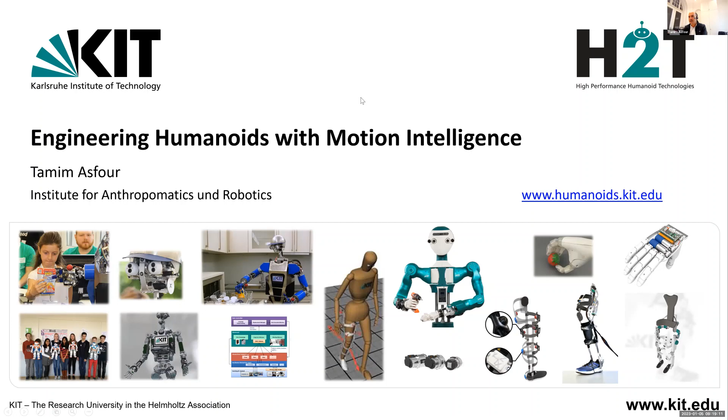Before starting, let me thank my group, a wonderful interdisciplinary team of students and PhD students from computer science, mechatronics, electrical engineering, physics, and mathematics. This reflects at least part of the interdisciplinarity of robotics. Of course, cognitive scientists and maybe neuroscientists are missing in the team, but we are an engineering-oriented university, and this is the same in my team.

We are working on humanoid robots, in particular humanoid assistance robots for daily tasks, but recently we also managed to demonstrate that these robots are able to perform tasks in industrial environments as collaborative robots. We work also on wearable robotics, so prostheses and exoskeletons. We developed the entire mechatronics for these systems, taking into account the requirements of robotics, where you have constraints regarding integration of hardware, mechanics, electronics, and so on in very small space.

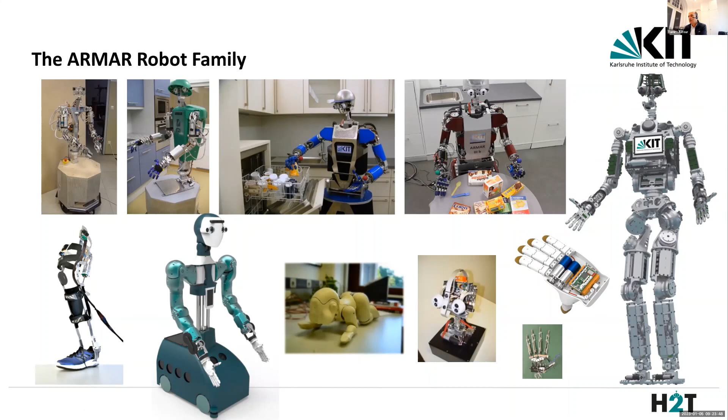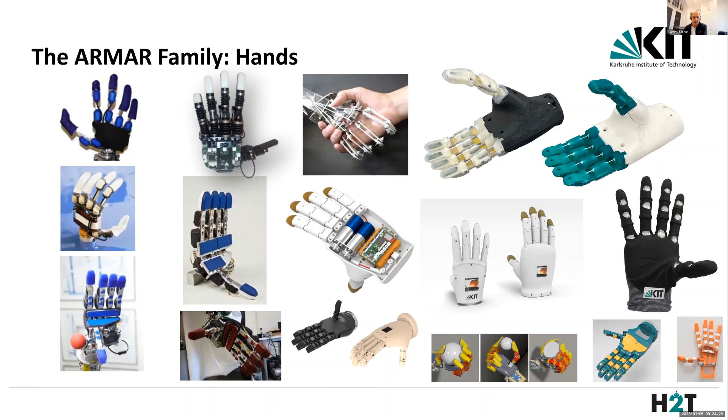Grasping and manipulation also requires hands which are able to deal with a wide variety of objects, and we believe anthropomorphic or humanoid hands are the solution. We started building pneumatically actuated hands with a high number of degrees of freedom, 11 and 14 degrees of freedom here. And we moved from these complex systems to less complex, 3D printed underactuated hands, as you see here, which can be used for humanoid robots, but also for prosthetics.

Here are some of the tasks we are working on. This is our lab.

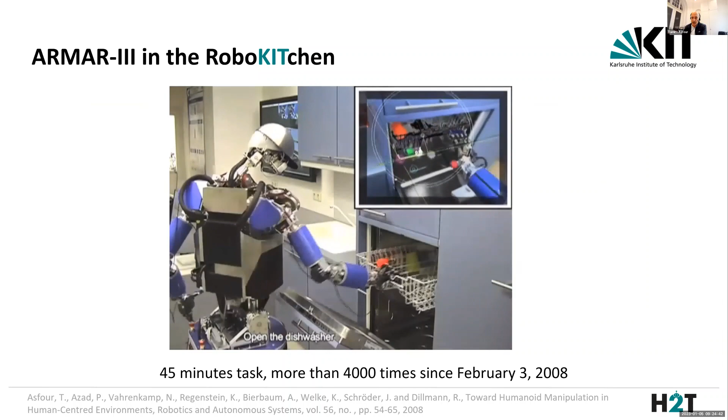It's a kitchen environment equipped with a dishwasher, with a fridge, and so on, where the robot is actually operating and learning how to perform these daily tasks, such as loading the dishwasher, such as bringing objects from the fridge, and so on, while interactively communicating with humans using natural language.

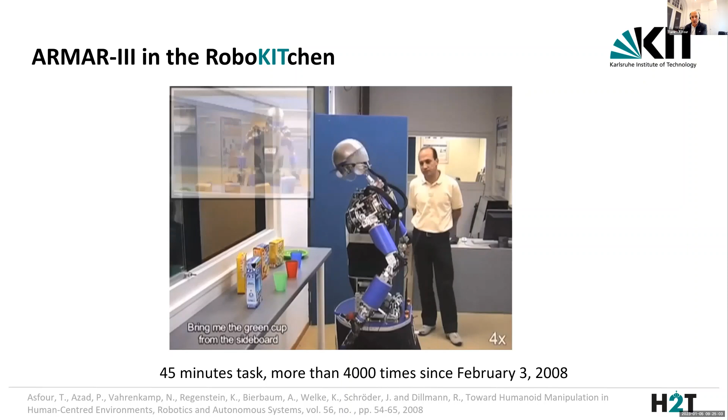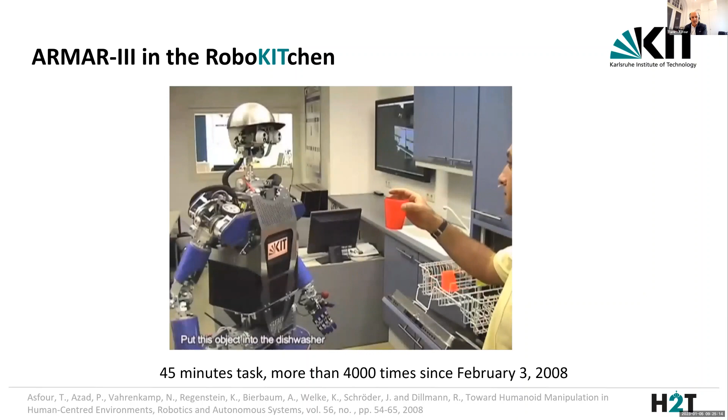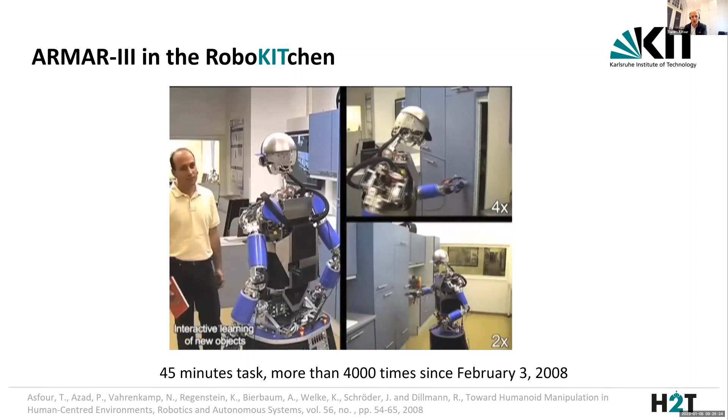I'm a little bit proud of this video, actually. This is my favorite video because I did it in February 2008. And since that time, we are able to perform these demonstrations or these tasks in the kitchen environment for almost every visitor who comes to our lab. And the robot is still working. It's 17 years old, actually, and it's still operating.

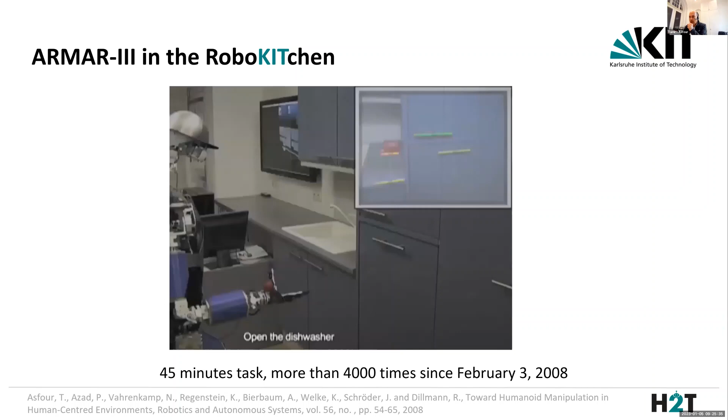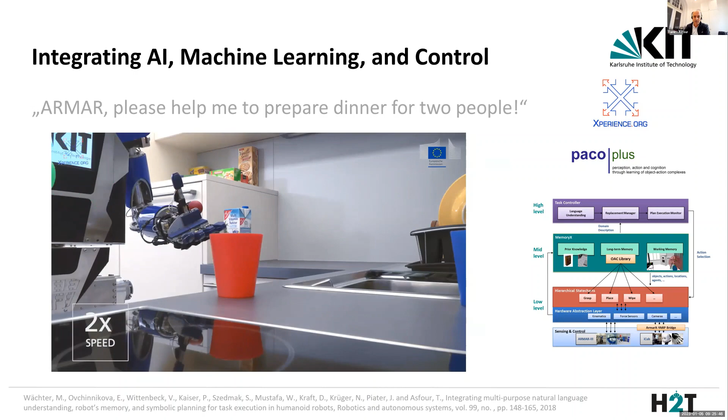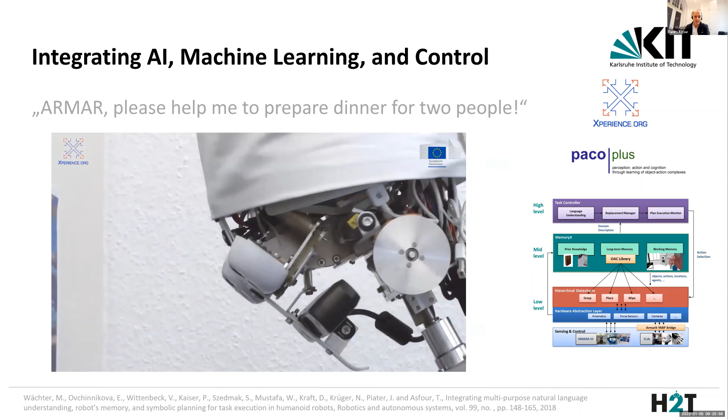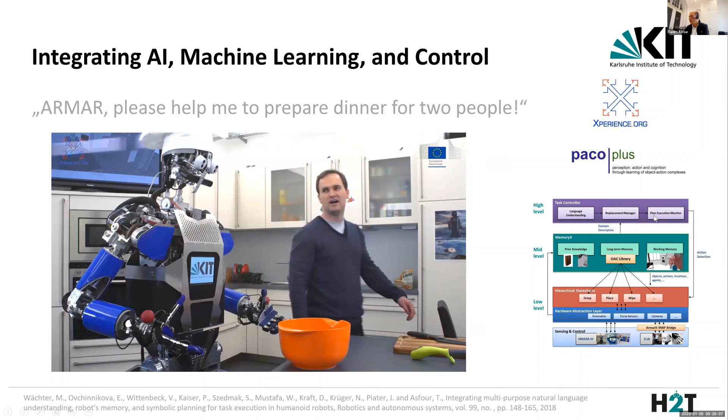So, a little bit more, actually, dive deeper into what's going on here. It's not only about really the execution of sensorimotor programs, but it's about the integration of symbolic and sub-symbolic information, of learning mechanisms into complete architectures, as you see here. An architecture where we have natural language understanding, planning and execution monitoring on the highest level. We have, of course, the sensing and control on the lowest level.

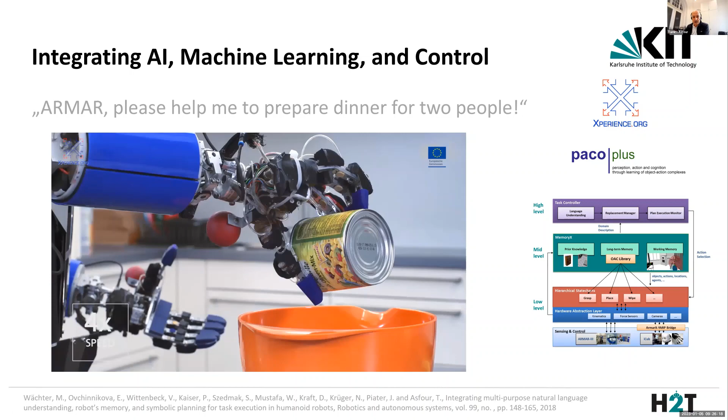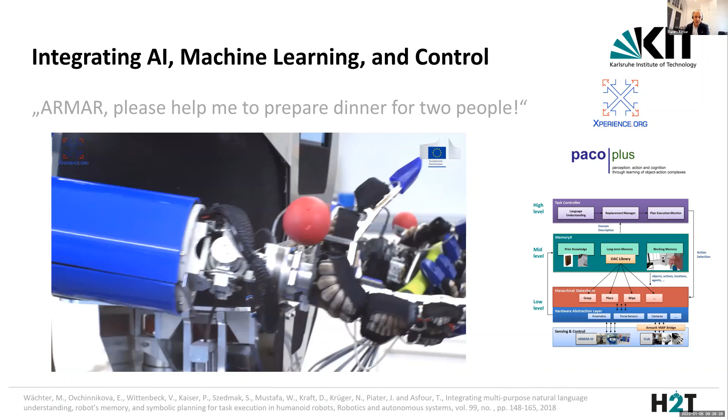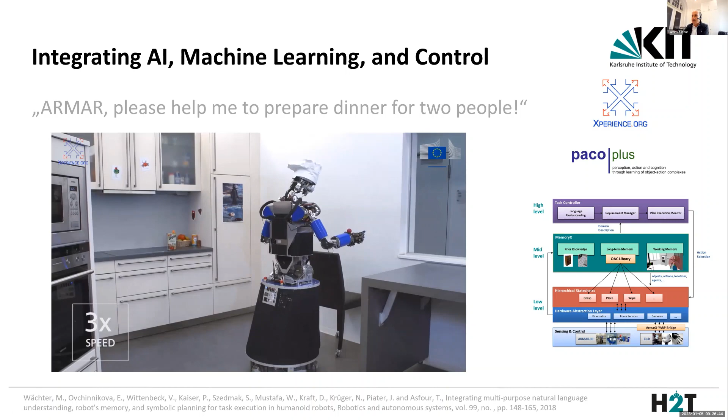And we believe that memories are very important to bridge symbolic and sub-symbolic representations. This is why there is this mid-level of the architecture, a memory level here, which includes different types of memories like prior knowledge memories, long and short-term memories, working memories, and in particular, recently we are working on the development of episodic memories.

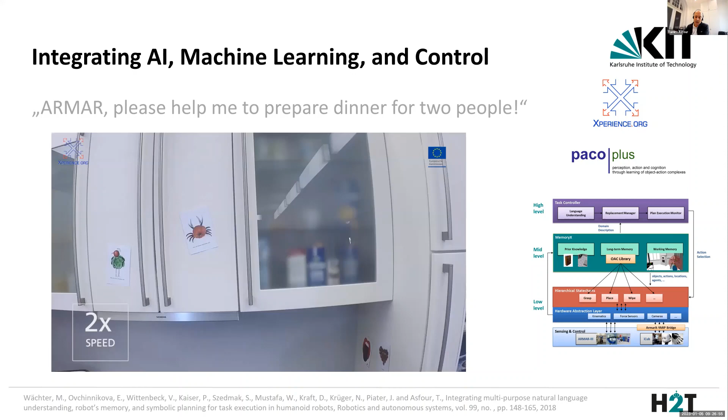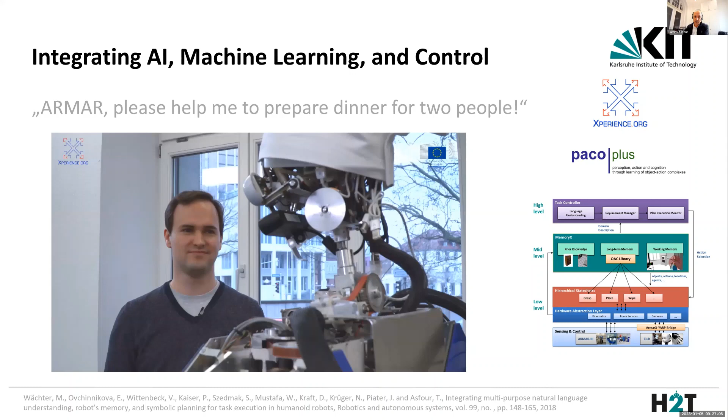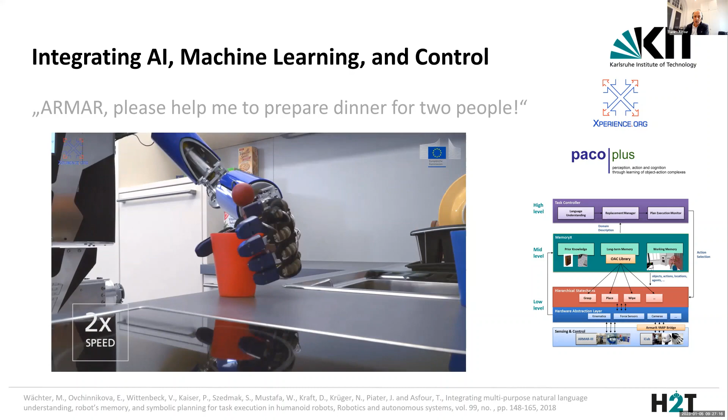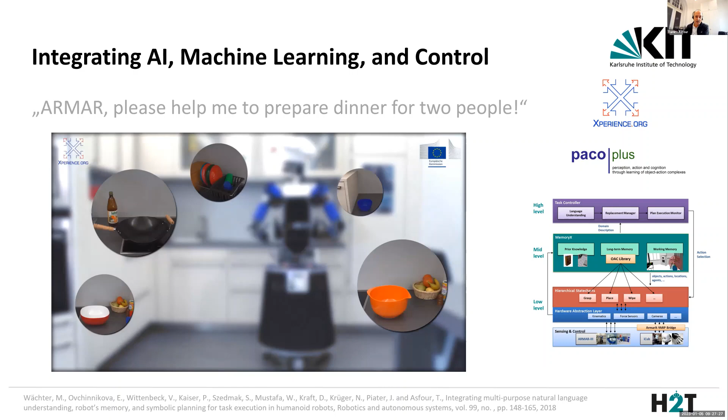But what you see here in this video is actually a robot performing a task, helping a human to prepare dinner for 2 people, not only by executing pre-programmed actions, but by reasoning about, for example, missing objects which are needed to execute the plan. So, for example, the robot can use object affordances in order to replace the salad bowl by the mixing bowl, or it can use object affordances extracted from text mining in order to replace a Coke by a multivitamin juice if the Coke is not available, for example, at home.

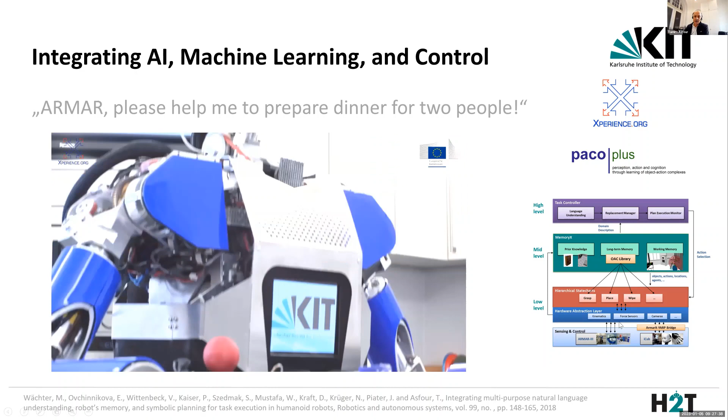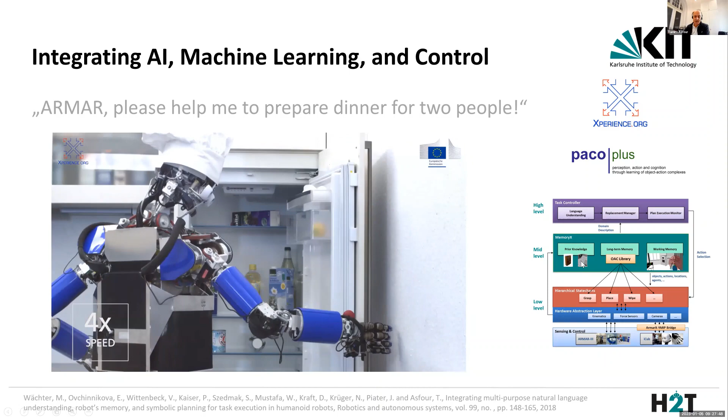In particular, we are heavily working on the realization of such transferable compositional architectures. And in the last years, we focused on the mid layer, which is the memory layer, and in particular there on the implementation of episodic memories as part of the long-term memory of a robot.

And the question is, of course, how to encode experience of a robot. Experience of the robot is everything the robot perceives with its cameras, with its microphones, the motion, with the proprioceptive sensors, and so on. And the second question is how to recall the experience in order to predict actions based on recalled experiences.

And the third question is how to use the knowledge in the episodic memory and to make it understandable for humans. In other words, how to externalize the experience of the robot in natural language, or how to verbalize that. And this is what we did in the past.

You see here a first example where, thanks to deep learning architectures, we could actually implement an episodic memory in which we store visual information of the robot about the task, of course, in latent spaces, and use this visual information in order to predict actions and use the predicted actions and also their durations for time-aware planning. You see here an example where a human is preparing breakfast with eggs. You see the observation and the recalled experience here.

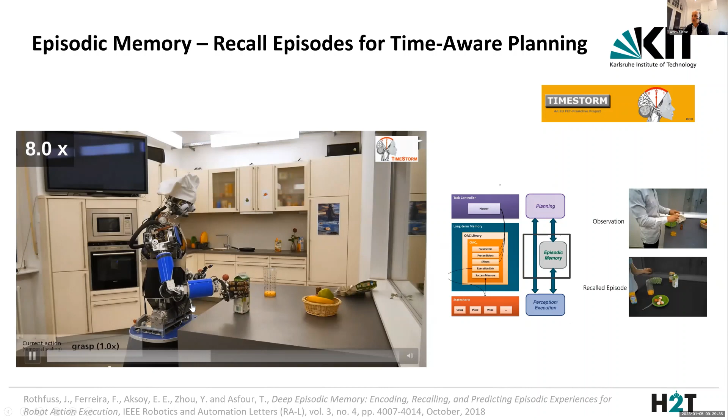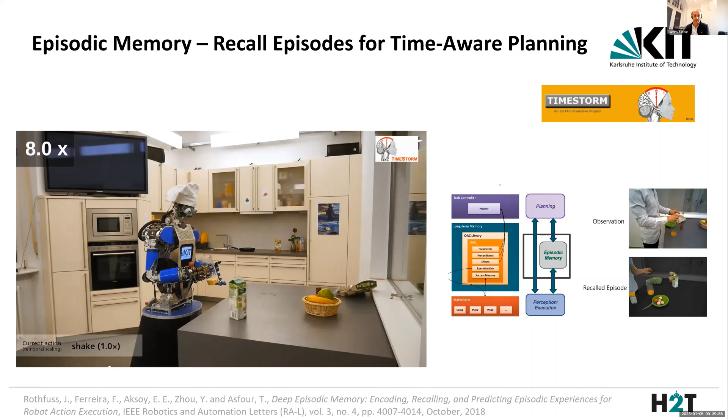And in the video, you may have seen that when a certain episode is recalled, the actions associated with this episode are recalled or predicted and used in order to generate a plan which fulfills the time deadlines we have, for example, to prepare a breakfast by accelerating or decelerating some of the actions required in the plan.

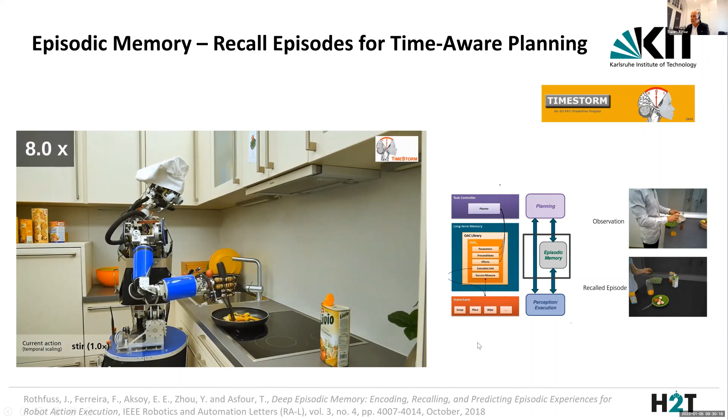Recently, we extended this work. I'm not going to talk about the detail of the deep neural architecture here. If you are interested, you can read it in this paper from 2018. But recently, we extended this work in several ways. So the first thing, we don't store only visual information in the episodic memory, but we store the pose and configuration of the robot, object IDs and locations, and symbolic tasks and the actions which are executed together with the time steps for the different actions.

And we developed two deep neural architectures for creating the episodic memory, not only from visual information, but for multimodal robot experience, and for the verbalization of the experience in natural language, by combining two encoder-decoder models, one which learned the latent representation for episodic memory using LSTMs, and another one for natural language processing using pre-trained transformer architectures.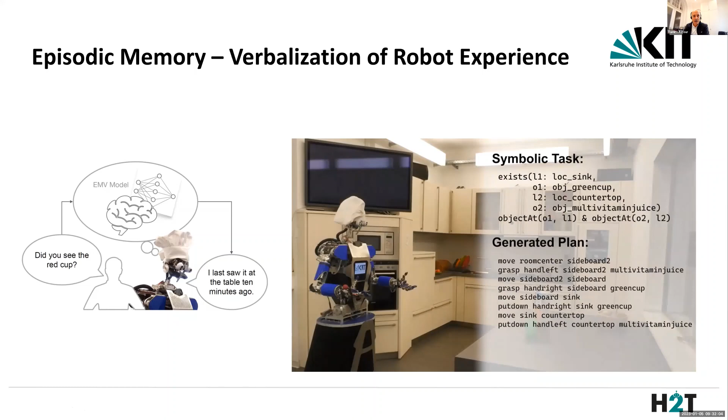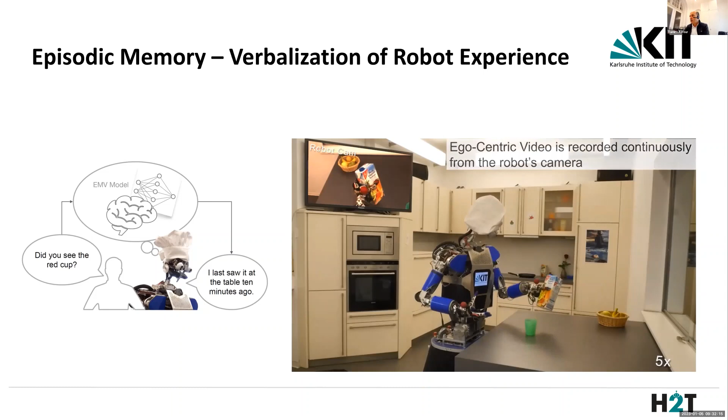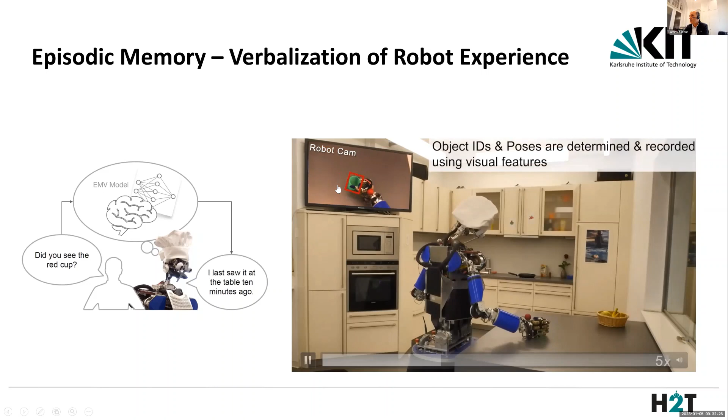I hope you can hear the sound. So Leonard actually said, I will be away for a few minutes. Can you please tidy up while I am away? And you see the robot is actually now executing the task, grasping the objects, storing the camera images, but also the configuration, the object IDs, the poses, which are determined, of course, using the visual algorithms we are applying. And building or creating this episodic memory, what I talked about, with every new data.

And at some point, you see here the creation of the episodic memory, which includes now not only the visual information, but also the multimodal information, including symbolic task information. Now Leonard is back, and he's asking the robot, "Tell me what did you do?"

I moved the multivitamin juice to the countertop. How long did it take to grasp the green cup today in the afternoon? It took about 1 minute. Tell me which object you moved to the countertop yesterday at 2 p.m. I moved the red cup. When did you last see the red cup? I saw it on December 9th at 14:56.

Thank you. So I hope you could hear the sound and the natural language interaction between Leonard and the robot, where Leonard was asking the robot, when did you last see the red cup? How long did it take to grasp the green cup? And so on. And I believe this natural instructability of robots, being able to interact and communicate in a natural way with robots, is crucial for the acceptability of robots by humans, but also for the explainability of robot behaviors to humans.

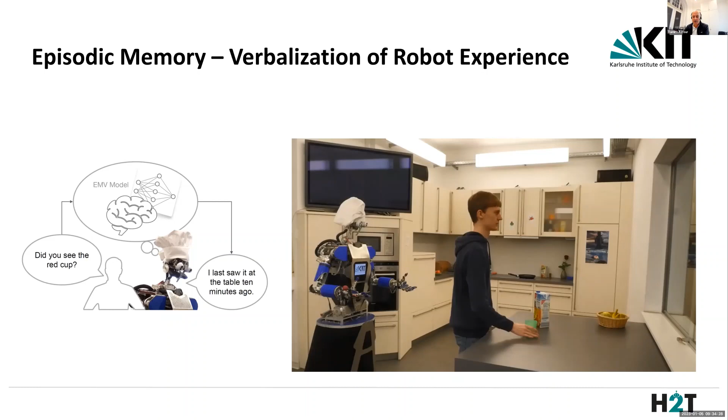And therefore, we are working on this instructability aspect by asking the question, how can we manipulate the scene using verbal instructions? So ARMAR, put the mustard on top of the rusk, please. This is a natural language instruction which should be understood. We should understand what's the target object. The mustard is the target object, the rusk is the reference, and the relation which must be fulfilled is on top of. Of course, this understanding should also happen in the visual domain. So we have to understand in the visual scene the current relations between the objects, that the mustard is now not on the rusk, and therefore we have to generate an action or a sequence of actions in order to fulfill this relation.

And this is very important because humans, as we know, often describe manipulation tasks on a semantic level, not on a sub-symbolic level. Therefore, the understanding of spatial relations is important and allows the robot to execute such natural language instructions. In order to solve the problem, we learn generative models of 3D spatial relations as parametric probability distributions based on cylindric coordinates. So we describe spatial relations not in Cartesian coordinates, but in cylindric coordinates, because they are more intuitive to express something like to the left, to the right, far or close.

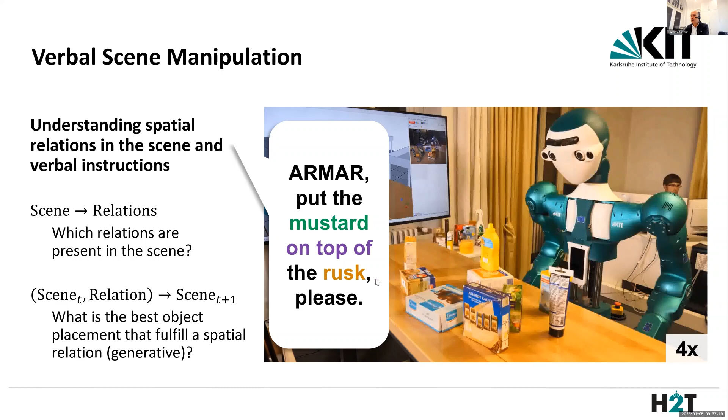And once we learn that and we sample from this distribution, then it's of course very easy for the robot to execute the task, because the robot needs a Cartesian position as target position for the action in order to place the object. And this is what you see here in the video. And we do that not only for one relation, but for other relations.

As you see here, we have other spatial relations, like something is on the left of something. So move the apple tea roughly to the left of the cereal bar, or put the apple tea on the other side of the cereal bar. So these are examples from our work on companion robots for daily activities.

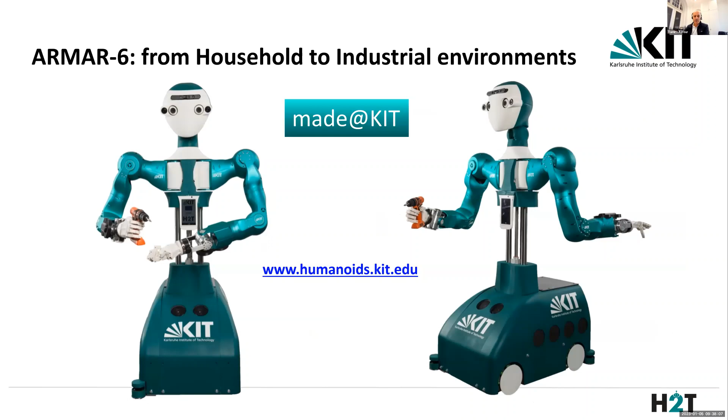But as I mentioned before, 5 years ago, we were part of a European project, the SecondHands project, where our task was to develop this robot, the ARMAR-6 robot, which should support technicians in industrial environments. In particular, in maintenance tasks in the fulfillment center of Ocado Technology, where you have these conveyor belts, which you see here, which should be maintained and repaired 24/7.

And this is how the tasks are done currently. You have two technicians. One of them is the expert who knows how to do these maintenance and repair tasks. And the other one is a technician supporting the expert by carrying heavy objects, by handing over the next tool, and so on.

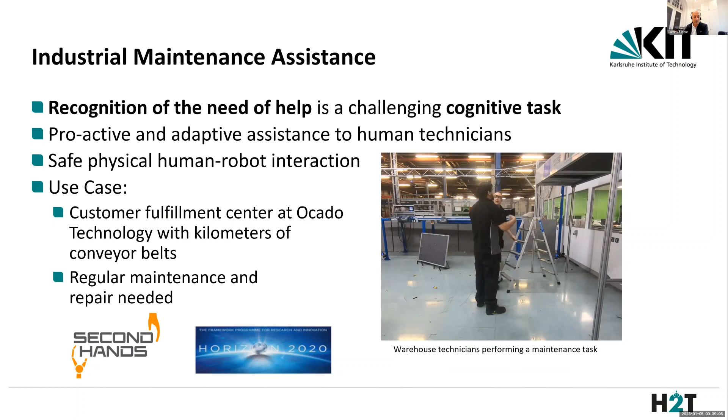And our goal of the project was not only to develop the robot in terms of its mechatronics and software architecture, but to endow the robot with the ability to recognize the need of help. So the robot should recognize the need of help and provide this help in a proactive way to a human.

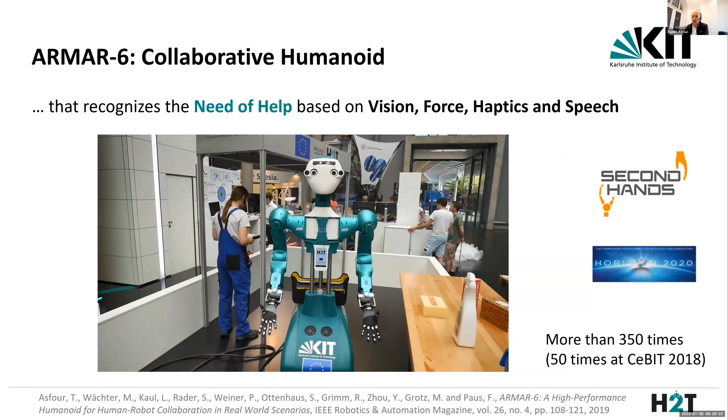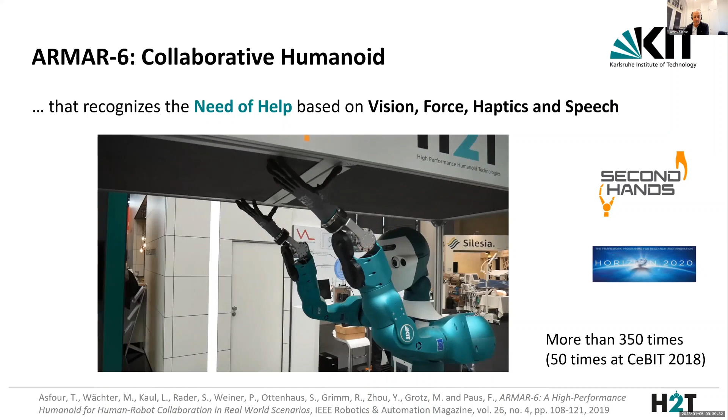And this is a demonstration that we showed at CeBIT 2018, where the robot was able to recognize the need of help based on visual information and interpretation of the current scene. You see here there is only one technician. The task requires two, and therefore the robot starts helping Pascal here in lowering the guard and placing it in a different position so that we can repair the task.

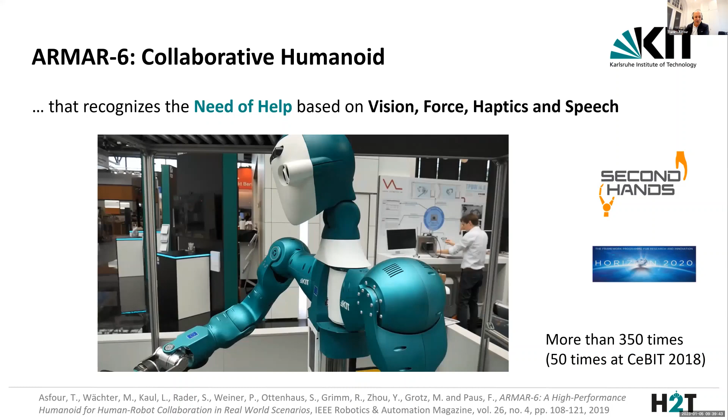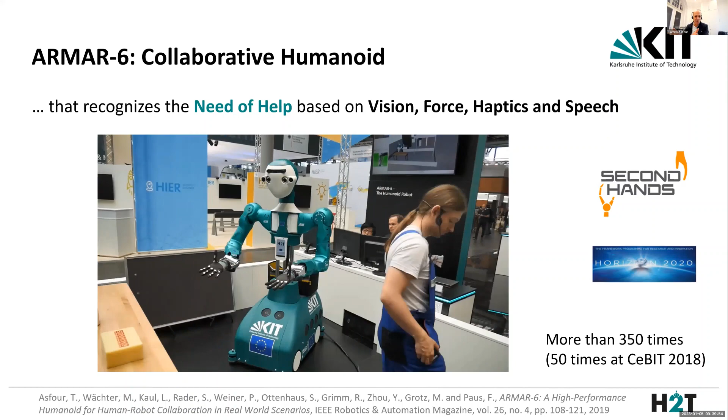So actually, a few weeks ago, Yuki visited us here in Karlsruhe, and she saw the demonstration, and she can tell you her impression. She was also moving the guard together with the robot here in our lab.

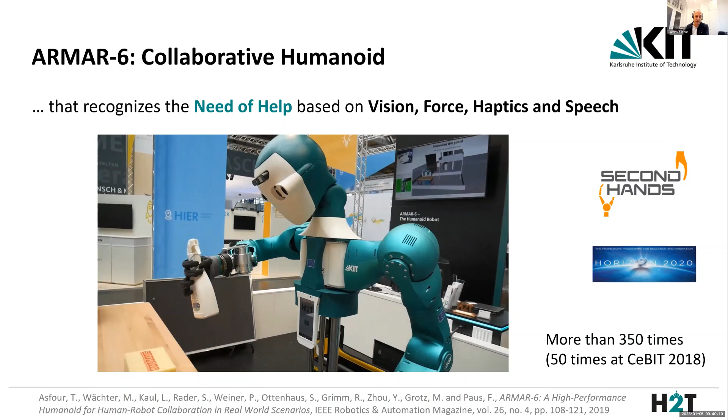So recognizing the need of help is really very difficult. And as I mentioned before, this can be done based on visual scene interpretation and our knowledge of the task. This can be done also based on force information. When you carry a heavy, large object together with another human, the force profiles that you experience can tell you that your cooperating partner is in need of help.

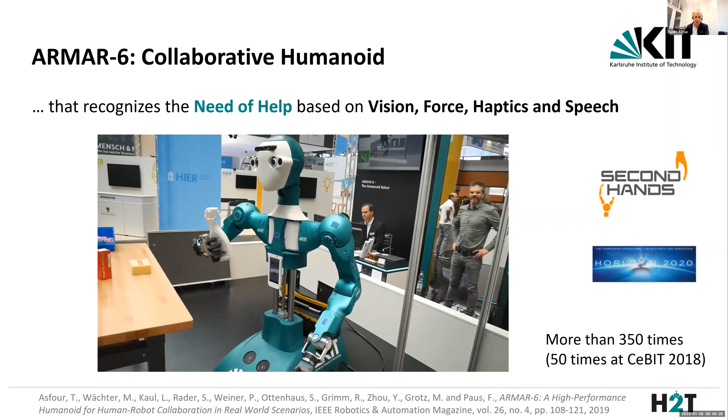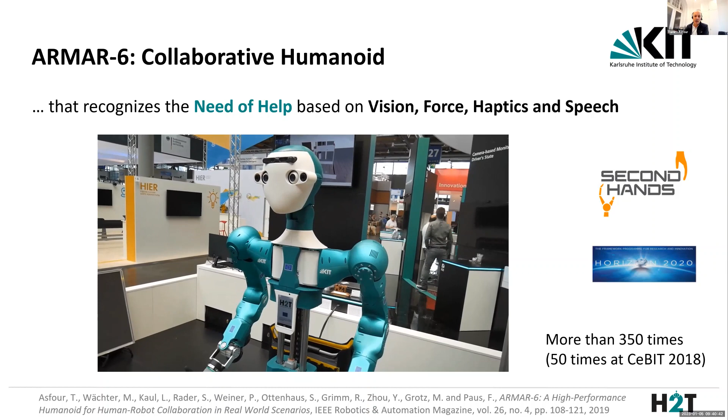But the easiest way is, of course, speech, to recognize the need of help based on speech, either by direct comments, please help me to do something, or by indirect comments like, oh, this object is heavy. And then the robot should, based on that, infer that its help might be required.

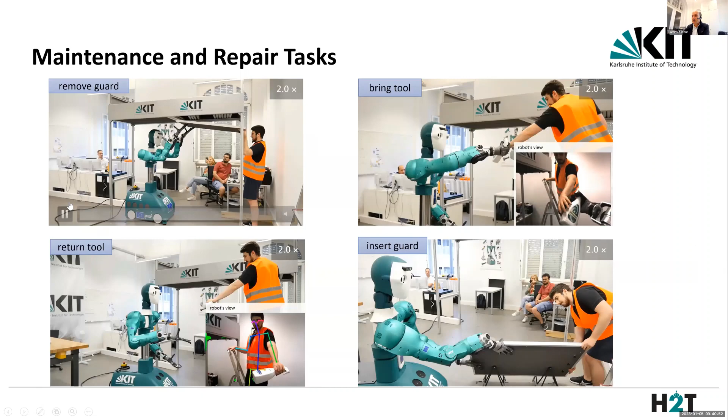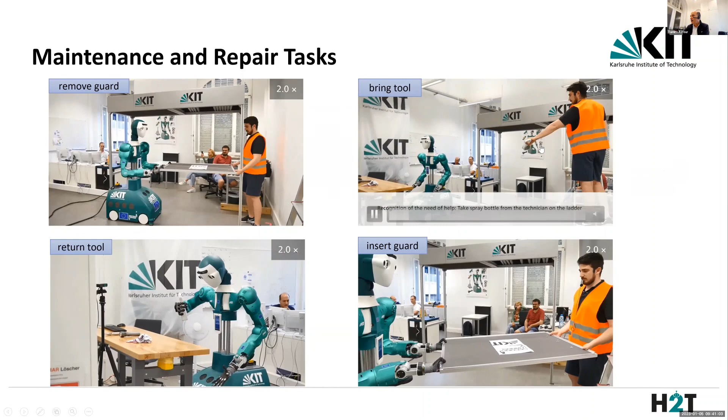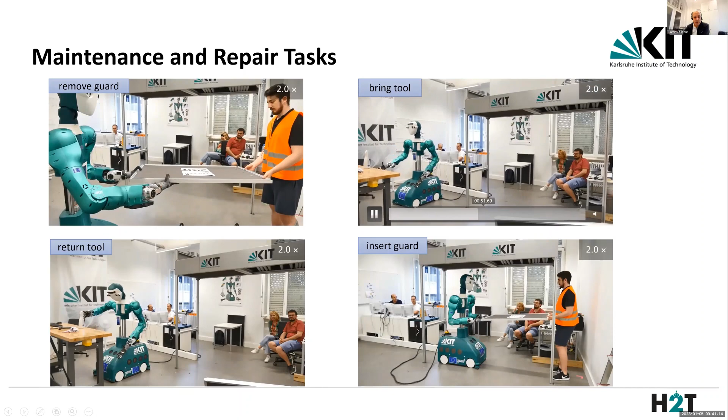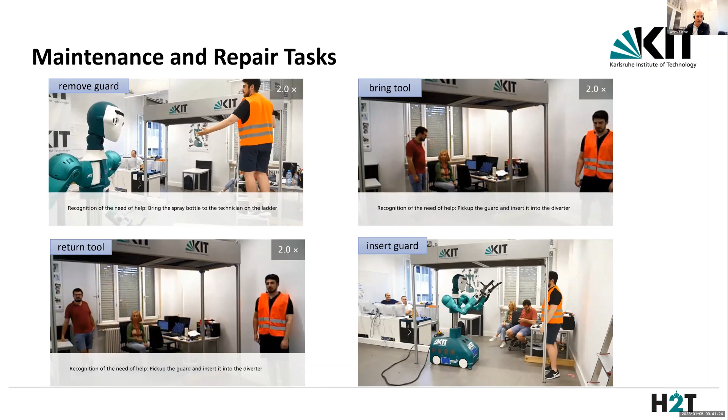You see here some of the tasks where this recognition of help based on force information, based on visual information, and interpretation of the intention of the human, like the handover here, is executed and performed. And we were very happy that we could also conduct experiments in the warehouse environments for 6 weeks, where technicians were able to work with the robot and execute these tasks in the real mock-up environment.

So the second application area we are working on with the same robot, with humanoid robots, is decontamination of nuclear installations. So Germany decided to stop nuclear energy a few years ago, and they have to decontaminate all nuclear plants. And you see here an example with contaminated parts, which should be cleaned.

And this is a human who has to pick up these objects from the box, put them on the rotating table, clean them, and then put them in a clean box. And we would like to remove the human from this decontamination cell by using our robots. And the question for us is how to grasp and manipulate these arbitrarily shaped objects in these boxes, with not so many features.

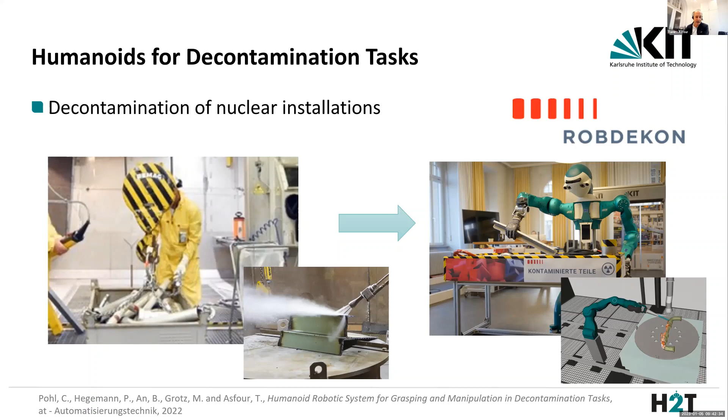They are hard to detect and to localize based on visual information only, and we don't have any model knowledge about the objects. And therefore, we apply affordance-based grasping methods, which we developed in the past, where we generate grasps or actions for our robots based on the interpretation of the interaction possibilities with unknown scenes. So you see here a cluttered scene.

This is a box with these contaminated objects, and based on this visual representation of the scene, the robot has to identify or extract the affordances. Which part in the scene affords grasping, pushing, lifting, or support?

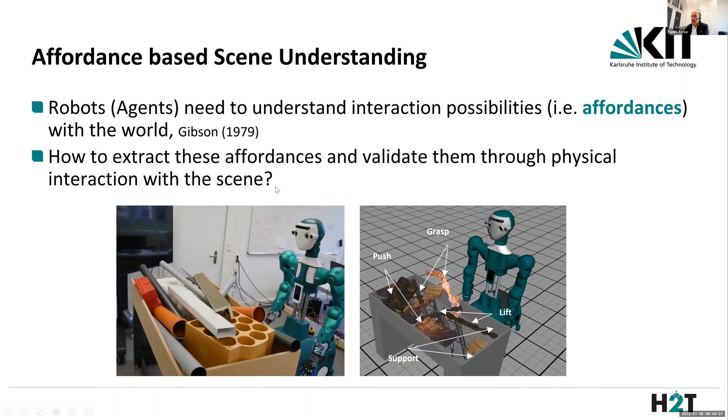And with that, we were actually able to develop an efficient, but not yet perfect, system for grasping and manipulating these difficult and unknown objects. And you see here examples where the selection of a grasp is done either manually by the human, by clicking on one of the extracted affordances, or by a human using VR/AR glasses and selecting the best grasp here, or

autonomously. And the first results here showed that the semi-autonomous grasp selection reduces the error rate to 28%, compared to 43% in the case of the autonomous grasp selection. This is very promising for us, and we are continuing the work in this area, because for us it's a question of grasping difficult, unknown, and heavy objects.

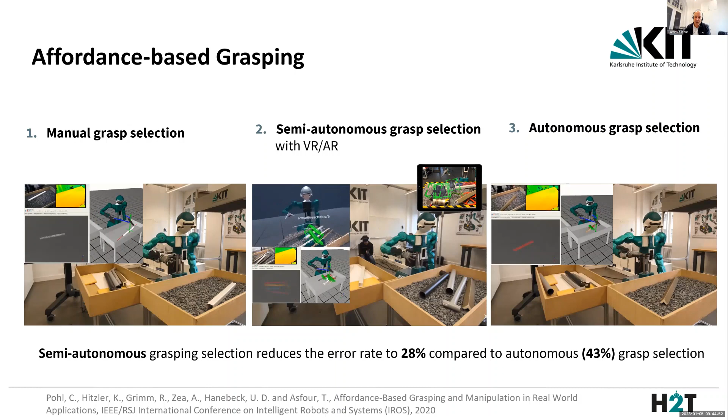And you see here in these examples, only single-handed actions are used in order to lift these parts. We are now also working on bimanual manipulation in order to generate bimanual grasps to lift these usually heavy objects. In the videos you see here, these are also objects in our lab and not the real objects we have to deal with in the real application.

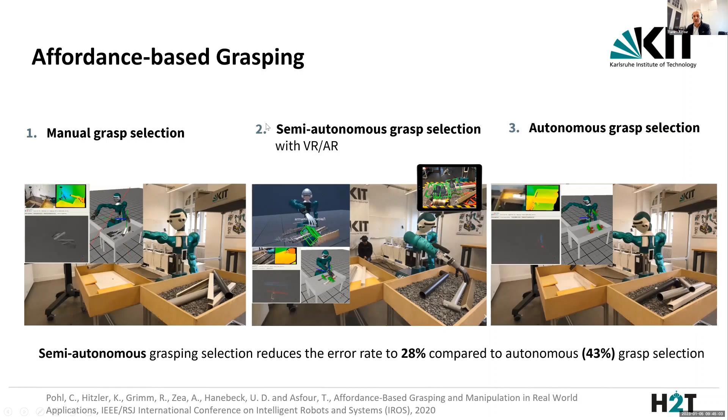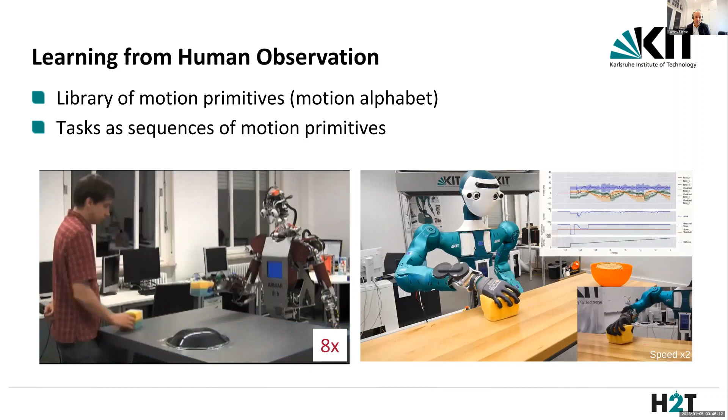So in this example here, it's not sufficient to learn the trajectory form; we also have to learn the constraints, which is contact with the environment, for example with the surface, so that we can adapt the learned primitive to different conditions, like wiping concave or convex surfaces. And the idea, as with many people in the field, is to learn this famous library of motion primitives and use these motion primitives, or sequences of them, in order to perform complex tasks.

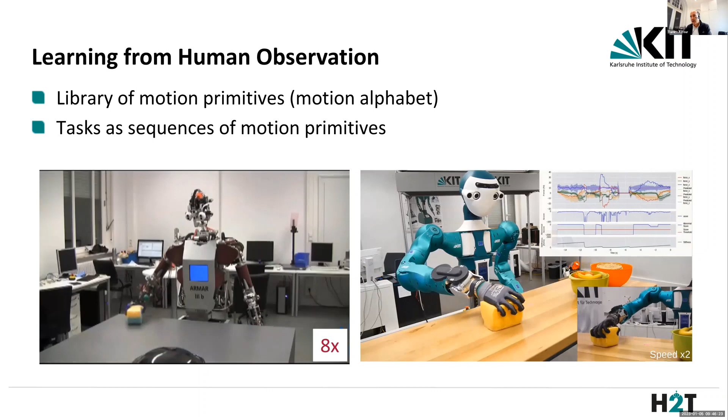And crucial is the way we represent these movement primitives, and therefore we developed a new formulation which we call via point movement primitives, which allow us to learn these motion primitives from multiple demonstrations while taking into account the different modes and modalities in the demonstration of the task.

And the idea behind that is that the trajectory or motion primitive is composed of two parts: an elementary trajectory, which is a spatial trajectory that connects two via points. They could also be the start and the end point, and it could be a linear or polynomial trajectory, where you can specify acceleration, jerk, and so on along this trajectory.

And the second term, F, which is the shape modulation. This is a probability distribution, to also allow learning these primitives from multiple demonstrations, which models the offset from the demonstration Y to the linear or elementary trajectory h. And with the help of that, we can do things like this.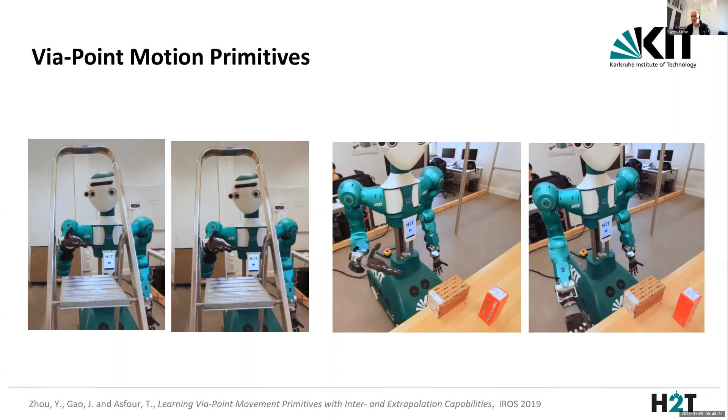With these via point movement primitives, we are also able to adapt them and generalize them to different task constraints. We use mixture density networks to do this generalization, and the robot is able, with the learned movement primitives, to generalize. You see here, the goal is to hit this target with the ball, either by throwing the ball directly at the target or throwing it at the wall so it bounces back and hits the target.

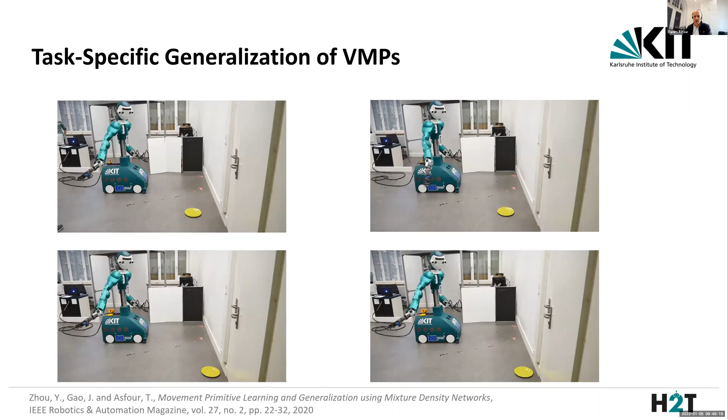These are isolated actions like wiping, throwing, grasping or reaching, and so on. But we are really interested in whole body actions. And we are interested in building what I call the robot internet of skills. And therefore, we collected a large amount of whole body human motion data.

In total, we have 42 hours of manually labeled human motion data, including object information, not only the motion of the human, but also the object information, as you have seen here. We also use a reference model of the human body here in order to unify the data, to have a unified representation independent of the teacher, whether the teacher is large, small, tall, short, and so on.

And you see here the object information, and we can actually retarget the human motion data here to this reference model of the human body, so that we have a unified representation on which we can develop our algorithms and from which we can map also to different robots. Of course, in order to do that, you need to understand or interpret the demonstrations. In other words, you have to segment the human demonstrations into the most important parts.

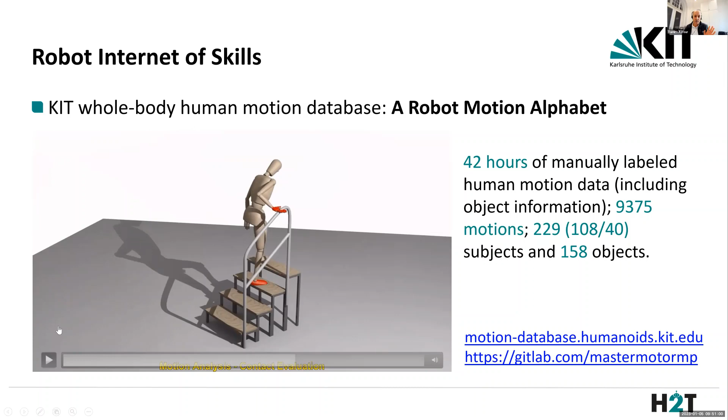And this is what we do here, where we segment whole body actions into trajectory segments, which can be, for example, represented by via point movement primitives. And we can do, of course, biomechanical analysis of all these recordings. You see here the center of mass trajectory, the angular momentum trajectory for this motion. And the goal is, as I mentioned, to actually generate motions for humanoid robots.

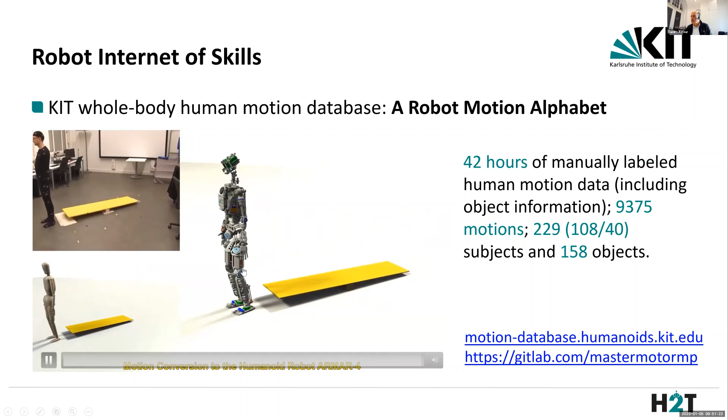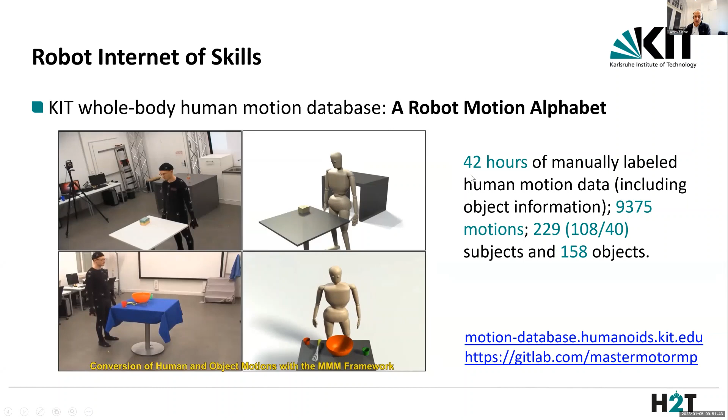The database is publicly available, and is maybe the largest publicly available human motion database. And the software which you need, for example, for retargeting, for visualization, and for segmentation is also publicly available for everybody. But the question is actually how to use this data in order to generate whole body motions.

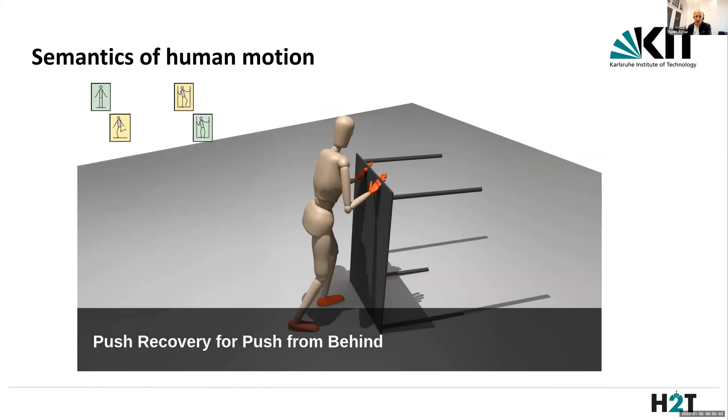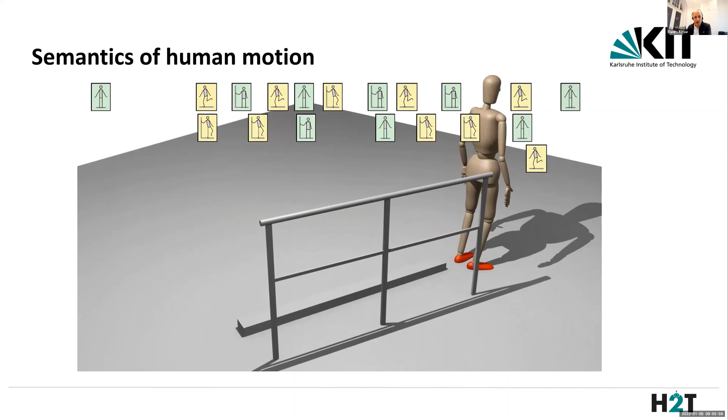And we were able to generate these actions, these whole body actions, as sequences of poses of the taxonomy. And we were also able to generate multi-contact whole body motions in times which are much shorter than what current state-of-the-art algorithms need, because we use natural language models, N-gram models, which predict the next pose in a sequence given the last n-1 words.

But back to manipulation, from whole body action to manipulation, and recently we are very much interested in bimanual actions, understanding bimanuality in humans, but also bimanual actions for our robots, in particular, for example, to lift heavy objects, as I mentioned before. And similarly, we started collecting, or have a large amount of data, and we started looking at categorization of different types of bimanuality in human actions. And we came up with another taxonomy, which is a bimanual manipulation taxonomy, where we classify bimanual manipulation tasks on the highest level as coordinated and uncoordinated tasks.

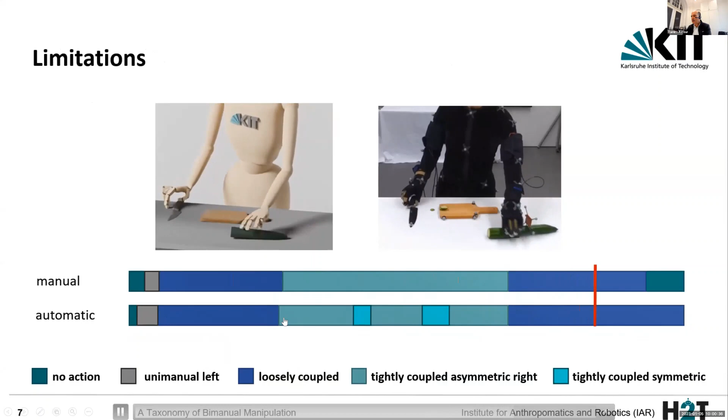Of course, the classification, which I mentioned before, and we are still working on some of the, you see here the manual labeled classification and the automatic classification. And some of the errors here we detected, and we are still working on improving the segmentation or improving the classification.

So I'm very excited that much of this work we are doing on humanoid robots is being transferred to a very exciting research area, which is prosthetics and exoskeletons. So we developed prosthetic hands with semi-autonomous grasping abilities. As you see here, the hands are equipped with cameras so that they can decide which grasp type is needed in order to grasp which object, and where the user, here an able-bodied person, has only to generate a very limited set of EMG signals to trigger the different actions of the hand. So this will reduce the cognitive burden on the user.

You see here, based on the object, the hand automatically selects the grasp based on visual information. All the visual processing is happening on board here using an FPGA on which we implement a deep neural network for the detection of 13 different grasp categories.

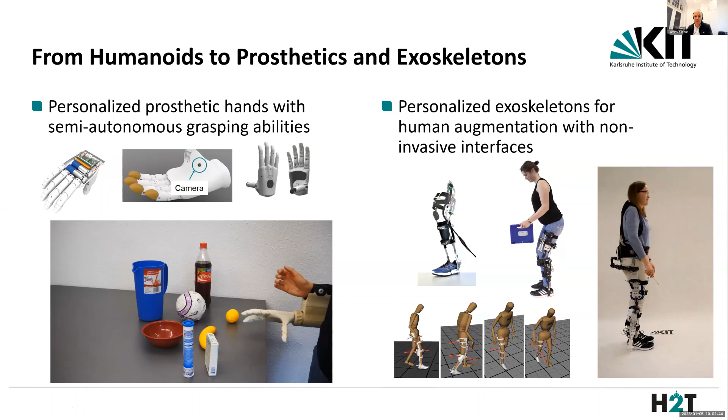And we are happy that we recently got significant funding in order to continue this work to develop humanoid robots as assistive systems for elderly people and exoskeletons. This is a project with 20 PIs from KIT, where we consider important aspects in the design of these systems which have not been considered so much in the literature, at least from my point of view.

We are actually targeting versatile systems. We're not interested in task-oriented systems, and maybe this is our motivation in building humanoids: understand how to develop systems which are able to perform a wide variety of tasks, how to personalize assistance and interaction strategies to different human needs, human behaviors and preferences, and of course the validation of the systems in the real world, which is a retirement home close to our lab, actually 1 kilometer away from our lab.

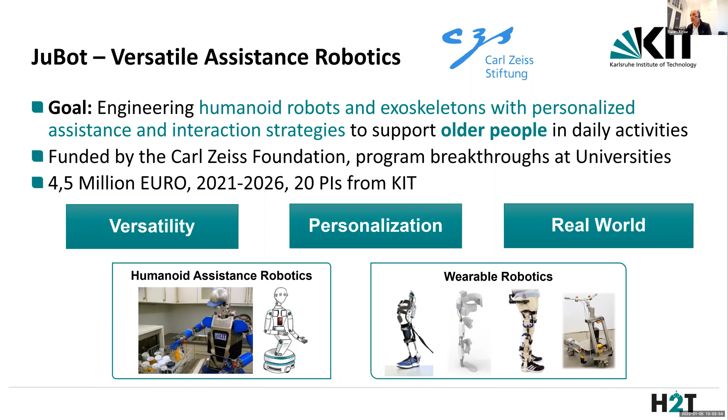You see here some of the results. We are developing the next generation of our humanoid robots. So household robots will be tested in our kitchen environment, which will be extended to an apartment, but also exoskeletons here for the lower extremity.

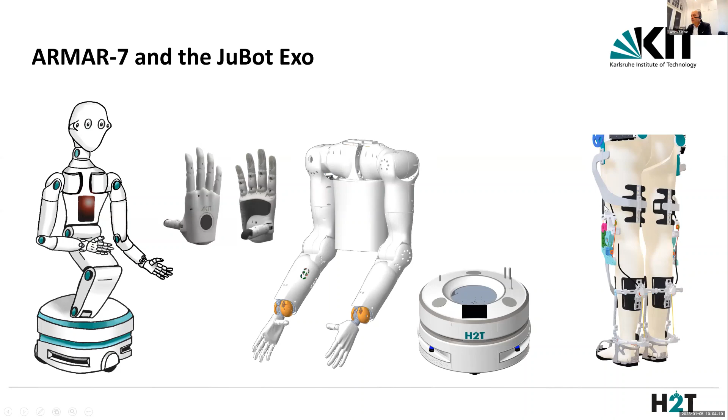In particular, in this JuBot project, in addition to the development of these robots, we are investigating questions related to privacy and security for assistive robotics. Because for us in robotics, the question we asked so far was always, is it feasible to perform a task by a certain robot? But when these robots should act as assistants and companions for humans, we also have to answer the question whether it is allowed to perform a certain task.

And therefore, we are working with colleagues from the computer science department doing work on activity-centric access and usage control in network systems, and trying to combine these architectures from network systems and cognitive architectures from robotics in order to answer both questions: the feasibility of the task and whether the robot is allowed to perform a task or not.

So the title of my talk was Engineering Humanoids with Motion Intelligence. And this is to emphasize a very simple difference from current AI, with of course breakthroughs in computer vision, in natural language understanding, and so on, where we have huge amounts of data and new systems which, thanks to the data and computing power, generate useful semantic information from the data. This is what AI is about.

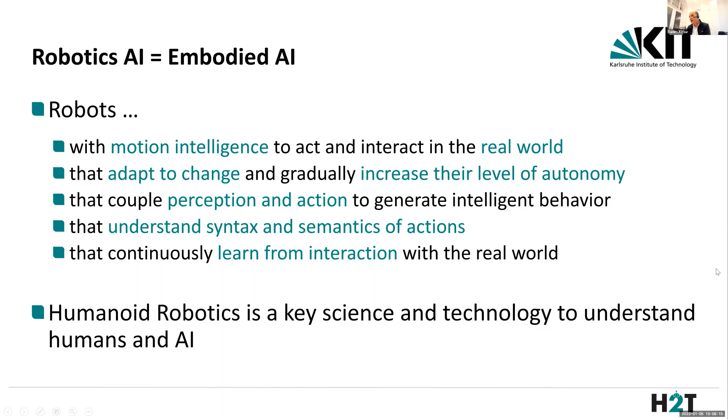Of course, with humanoid robotics, and this is one of my motivations in working with humanoid robotics, we would like to develop technologies to support humans, but I believe that robotics, in particular humanoid robotics, is also key to understanding humans and understanding artificial intelligence. The challenge I see is the real world, actually.

Engineering systems for the real world, and systems which are versatile, which go beyond task orientation. If these systems should act as companions and assistants for humans, they should be privacy aware, safe, and trustworthy. They should be able to learn in a 24/7 manner, to adapt to change.

This is the core of intelligence, being able to adapt to change. And robots which are able to interact and communicate in an explainable way and to act ethically. Very important is the acceptance and the assessment of the technology, the consideration of ethical, legal, and social implications of the technology we are developing.

And this cannot happen by just having us as engineers, computer scientists doing this work. This can only happen by a joint or bidirectional dialogue between society and scientists. And we are happy that we received recently a project from our local state, the Ministry of Research in the state of Baden-Württemberg, where we would like to make artificial intelligence tangible, in robotic words, graspable through humanoid robots.